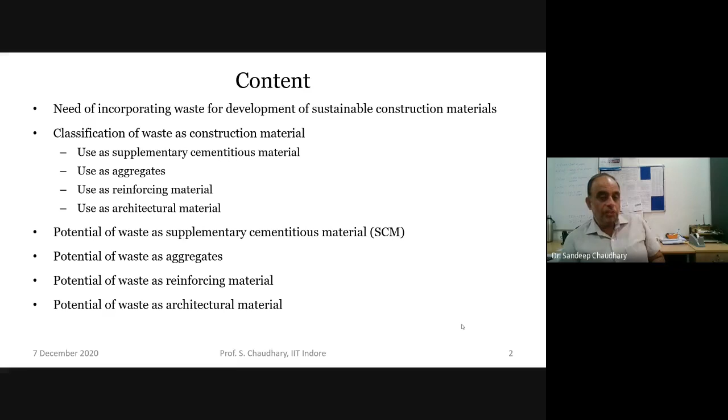Before going into that, we know that Indian Standard 383 now allows the use of most waste materials in construction, particularly in concrete. Because though people were using different types of waste in concrete, there was no documentation and no guidelines. But in 2016, Indian standards came forward. Of course Mr. Pant will also be delivering a lecture, and he'll discuss a little bit about that. After the revision of IS 383 in 2016, there has been a shift, and people have now started thinking very seriously about these aspects.

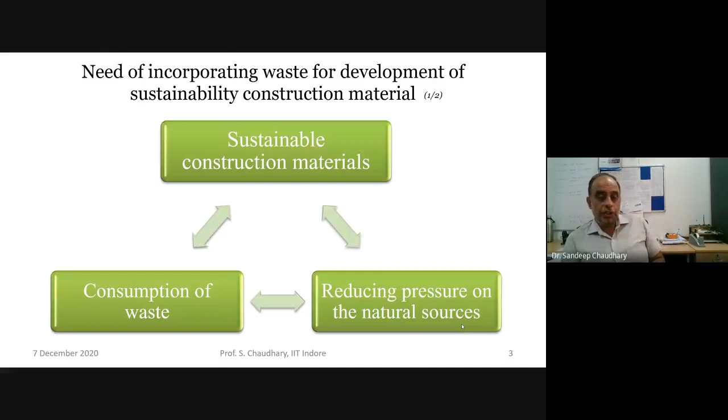If we talk about the need for incorporating waste, the idea is that on one side we have to consume the waste, which is a headache for us, and on the other side we have to use natural resources for concrete. We know concrete is the most widely used construction material, and its basic ingredients are cement, fine aggregate, and coarse aggregate, and everywhere we need natural sources. So there's pressure on one side to reduce natural sources, but on the other side, pressure to consume these wastes also. If we can make a balance and use waste in concrete, that's a win-win situation, and that is the need.

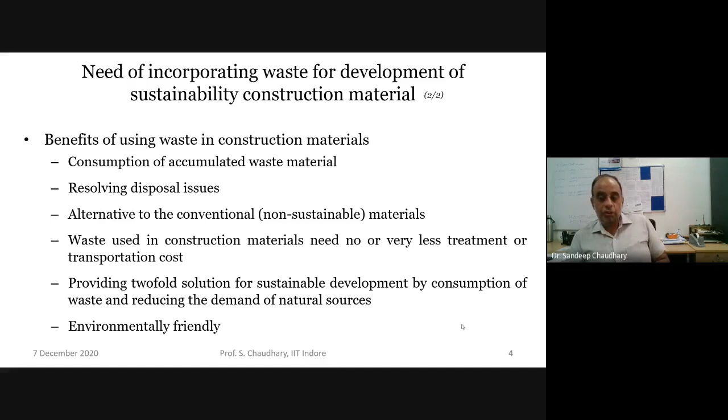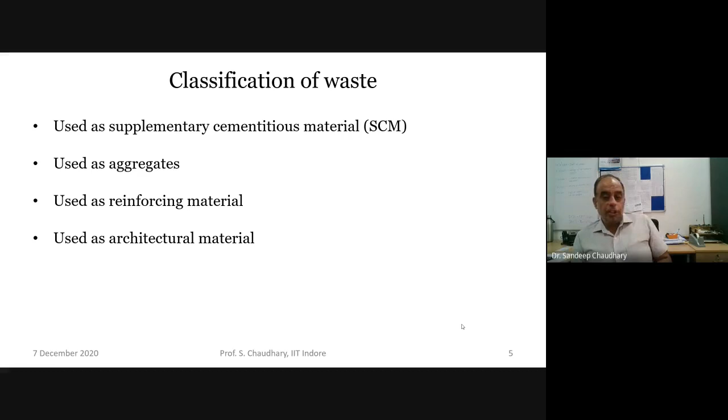So if we use waste, we can consume waste material, resolve disposal issues, use them as alternatives to conventional materials, and mostly they need no or very little treatment, providing a twofold solution. Now we'll go one by one and discuss different types of materials people have been using or talking about. Materials can be used as supplement to cementitious material, as aggregate, as reinforcing material, and as architectural material.

Now coming to supplement to cementitious material, we can use fly ash, GGBS (ground granulated blast furnace slag), rice husk ash, silica fume, metakaolin, glass powder, and marble powder. Of course, like fly ash, I understand Dr. Agrawal has worked extensively on that. And Kota has a lot of fly ash, and RTU has been working at the forefront in this area of utilization of fly ash in concrete in different manners. We'll discuss a little bit about that also.

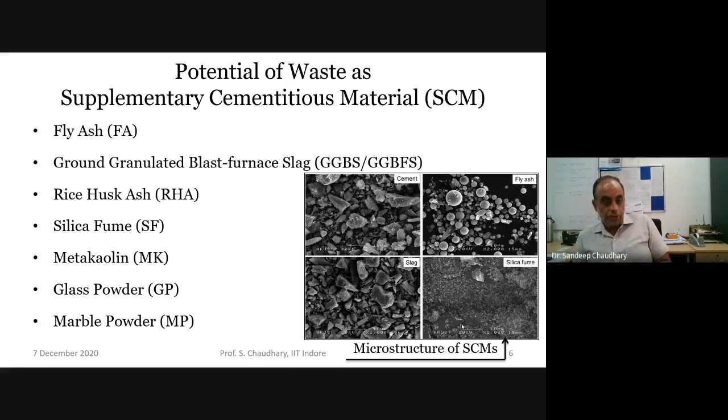So these are different materials which can be used as cement, or as a replacement of cement, or as supplementary cementitious material. We know some of them can be used as replacement of fine aggregate, but as engineers, we know it's always advisable to go for better uses. That is, if you use them as replacement of cement, that is a better situation. So coming down to fly ash, we know there are two types of fly ash basically.

One is class F, which contains less than 7% lime, glassy silica and alumina. And then there's another class C, which contains more than 20% lime, which is self-cementing.

We know nowadays, mostly if you go to the market, you'll just find Pozzolana Portland cement, because this fly ash is being used in the cement manufacturing, and instead of OPC, we're just getting Portland Pozzolana cement. So fly ash is an important ingredient there.

As Professor Sitharam was saying, it can be used in embankment, soil stabilization, flowable fill, asphalt, concrete. Geopolymers, of course, nowadays, that's another type of concrete where there's a complete replacement of cement by the fly ash. We can use it in roller compacted concrete, bricks, etc., fly ash bricks, etc.

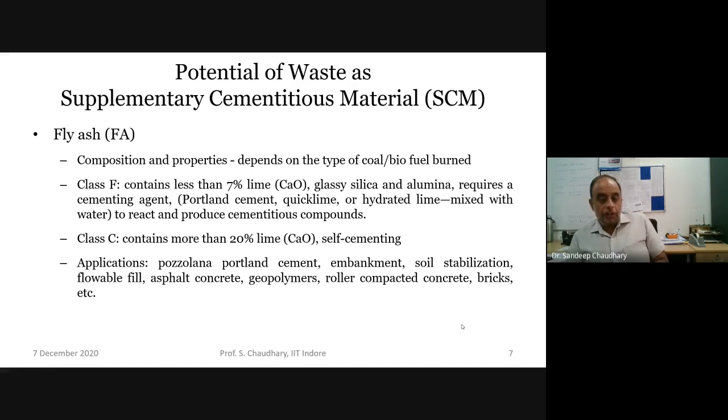But the idea is, what is the optimum uses, and what are the advantages and disadvantages? If we see the microstructure of coal-based fly ash, mostly we can see that it's a sort of spherical shape, and it gives a sort of later strength. If we need a high early age strength, we'll not get that strength. So we should know that it gives the same strength, but at a later age.

It is so much used now, it's difficult to find ordinary Portland cement in the industry. I see there are some persons from cement industry also. So for research purpose, if we have to use OPC cement, we have to ask especially for procurement. Otherwise, mostly PPC is available.

This fly ash can be used in soil stabilization also, and nowadays fly ash bricks are also being used. There are mandatory guidelines also from NGT and from the government that within a certain range of these thermal power plants, we cannot use fired clay bricks. We have to go for fly ash bricks only.

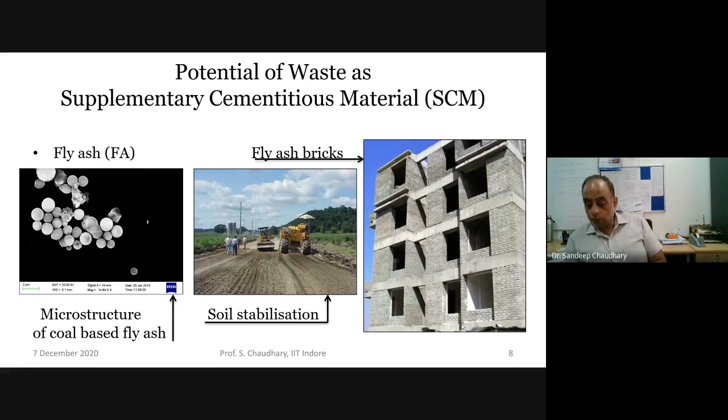Another supplementary cementitious material is GGBS, and it is obtained by quenching molten iron slag from a blast furnace. Here, of course, we know that if we talk about cement, mostly what is important is CaO and SiO2. So here it has both the components, CaO and SiO2. So it can be a very good supplementary cementitious material.

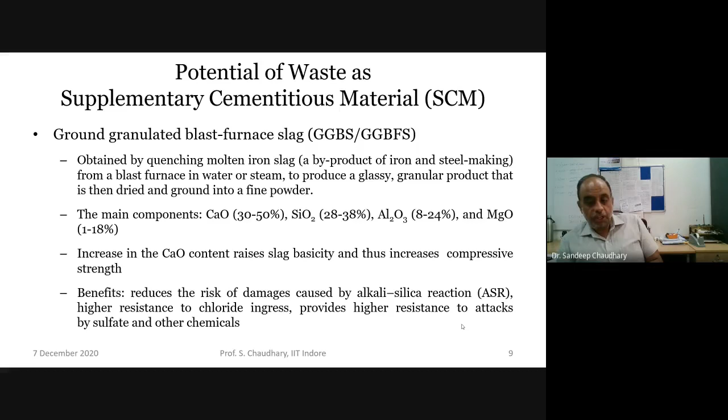If there's a higher CaO content, it will raise the slag basicity, and thus it will increase the compressive strength. The benefits are it reduces the risk of damages caused by alkali silica reaction. That's a durability aspect, which you might have gone through in your bachelor's or master's. And it gives high resistance to chloride ingress, and provides high resistance to attacks by sulfate and other chemicals. There's a schematic picture showing how it is obtained from the steel furnace slag.

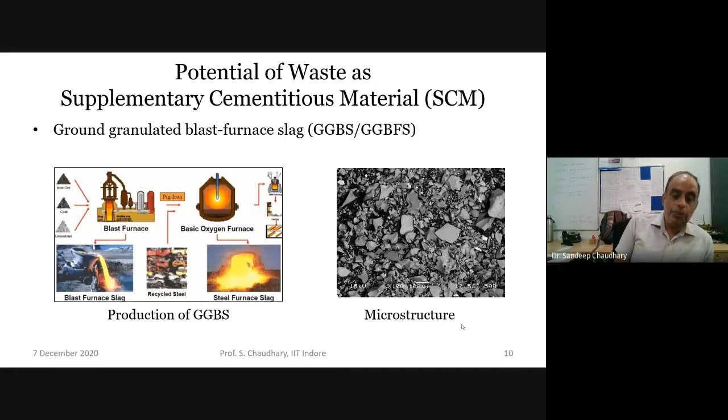So accordingly, we can identify the areas of application where GGBS can be used or where fly ash can be used.

Another very interesting supplementary cementitious material is rice husk ash, and it's the agriculture byproduct obtained by burning husk under controlled or uncontrolled temperature below 800 degrees centigrade. It is highly pozzolanic because of 85 to 90% amorphous silica, and pozzolana activity.

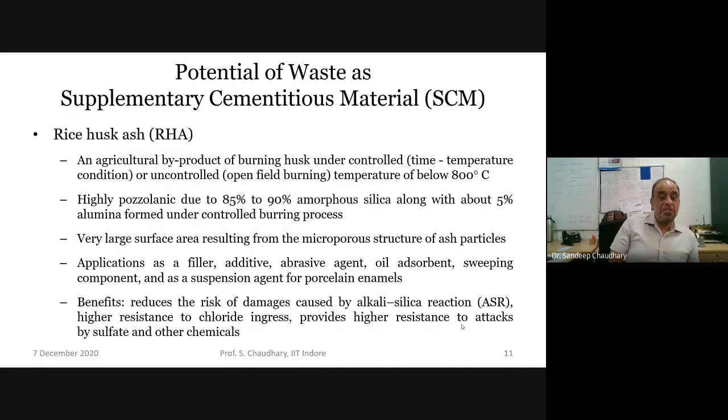Just to repeat, we call a material pozzolanic when in presence of water it gives us cementitious properties. So it's highly pozzolanic and has 85 to 90% amorphous silica. Important point here is what has been written is amorphous silica. So just presence of silica does not matter, it should be amorphous in nature. So there might be some other material which has higher silica, but if it's crystalline in nature, then it's not going to give us any advantage. So what is important is we should look for that amorphous silica.

And of course, it has 5% alumina also, and it has a large surface area. That will result in a sort of higher reactions. This forms from the microporous structure of ash particles. It has a wide application such as filler, additive, etc.

When we are using it as a supplementary cementitious material, we should understand that it's no more a free waste. Nowadays, if we have to procure this rice husk ash, we have to procure it in the form of bags and pay for that also. So it's just not that you are using a waste. Now we have to look for an economy also, because it has some other advantages. People have been using it in industry for other purposes, so there is a cost associated with that. We have to see the benefit versus the amount of money we are spending.

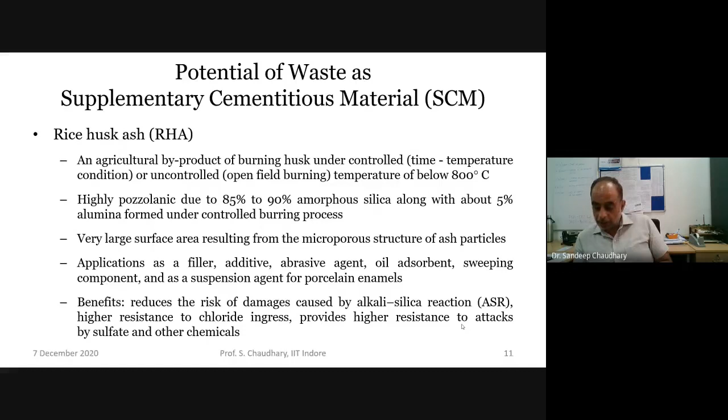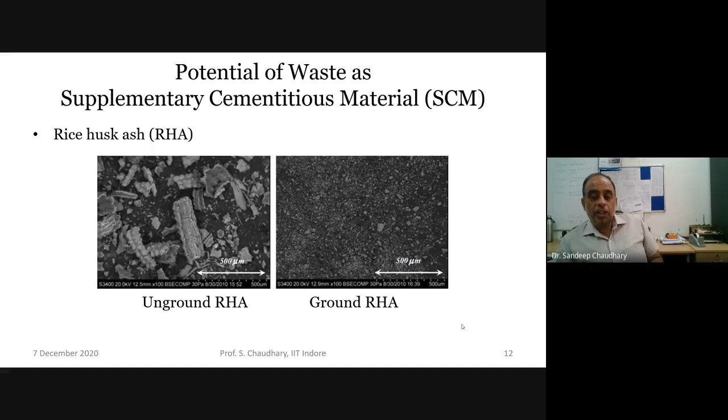The benefits are it will reduce the risk of damage caused by alkali silica reaction, high resistance to chloride ingress, and high resistance to attacks by sulfate and other chemicals. If you see its microstructure, in unground form there is a plate or granular type of structure, but in ground form there are very small particles.

Another interesting supplementary cementitious material, and if you talk about the one which gives us maximum strength, standing among the top, is silica fume. It's an ultrafine powder collected as a byproduct of silicon and ferrosilicon alloy production. It has spherical particles less than 1 micrometer in diameter, approximately 100 times smaller than an average cement particle. This small size is the USP of silica fume because it gives a very high surface area, leading to a good amount of reaction. This high fineness and presence of silicon oxide between 85 to 95%, even 98%, is responsible for high pozzolanic reactivity.

The oxides of silica fume react with and consume calcium hydroxide, that is CH, which we obtain from hydration of cement. This leads to densification of the matrix, strength improvement, decreased porosity, and better resistance to chemical attack.

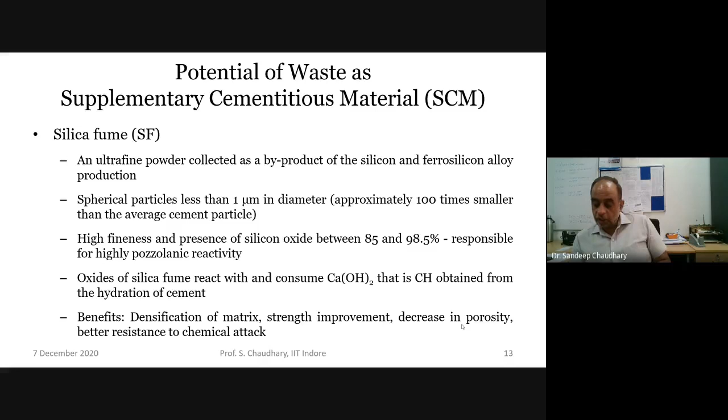Whenever we have to go for high strength concrete, that is concrete above M50 or M60, mostly it's a compulsion to use silica fume, because among the supplementary cementitious materials readily available in the market, silica fume stands at number one in giving maximum strength. Of course, the cost is associated with that, along with issues like heat of hydration due to those reactions. But anyway, to have very high strength concrete, you necessarily have to go for silica fume.

So the idea is, if we are going to use any material, whether as a supplementary cementitious material or as a replacement of fine aggregate or coarse aggregate, we have to link it from the microstructure. Here we are just seeing the scanning electron microscope images; I have not touched upon the XRD and EDS part. But ideally, if we are going to use some material as a supplementary cementitious material or in whatever form in concrete, we should start from this scanning electron microscopy, then go for the XRD images.

We should go for the TG analysis, etc. First we have to see the individual characteristics of that material. We should not go with the idea that it's a waste, and if there's any waste, just put it in concrete. Once we know these SEM images, once we know this XRD, we can very well judge what's going to happen finally when we use it in concrete.

Then we can go for mechanical tests and durability tests. The best way is to perform all the tests from the microstructure to the final test, or to the final application in structural elements like beams, etc. Then we have to see in totality whether our assumptions from the SEM images or from XRD investigations are getting reflected in the final results or not.

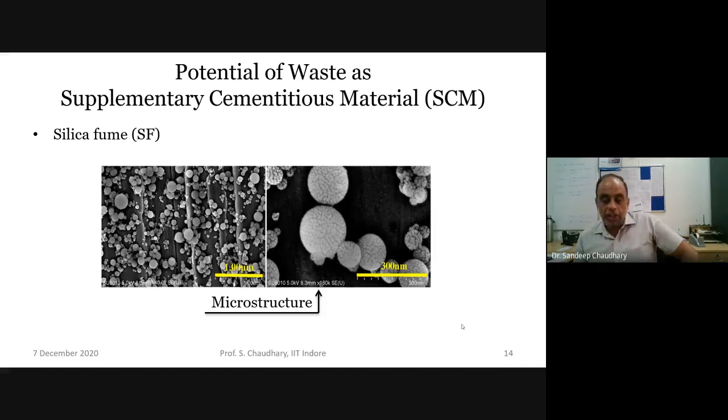That we can see only if we see everything in totality, from microstructure to complete analysis.

Another very recent area in which people have been working is LC3 cement, or the use of metakaolin. This is produced by calcination of high purity kaolinite clay at a temperature range of 700 to 850 degrees centigrade, and it's finer than cement particles. This helps fill the micropores of the binder. It contains a high amount of reactive silica and alumina, and provides better particle packing. The benefit is it improves compressive strength at early stages, low permeability, and decreased chloride ion penetration.

Of course, it's still a new material, and people have been working on different aspects, like the uses of fly ash and silica fume. There is complete literature available where you can find the effect of fly ash on compressive strength, flexural strength, tensile strength, all durability properties, and on microstructure. Same is true about silica fume.

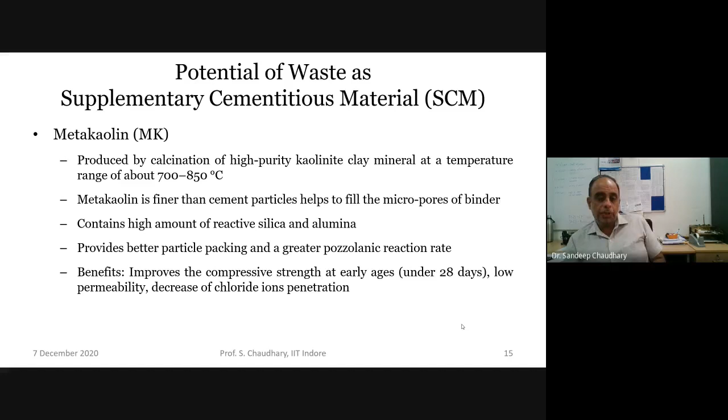So if we are using glass powder, we have to proceed with caution, and we cannot go for very high levels of replacement as in the case of fly ash and silica fume. Here the level of replacement is limited by this alkali-silica reaction aspect. So that's another interesting research area: can we control this alkali-silica reaction, and can we go for high levels of replacement of glass powder in concrete? Of course, there are benefits involved here - it improves workability, mechanical properties, and decreases permeability, etc.

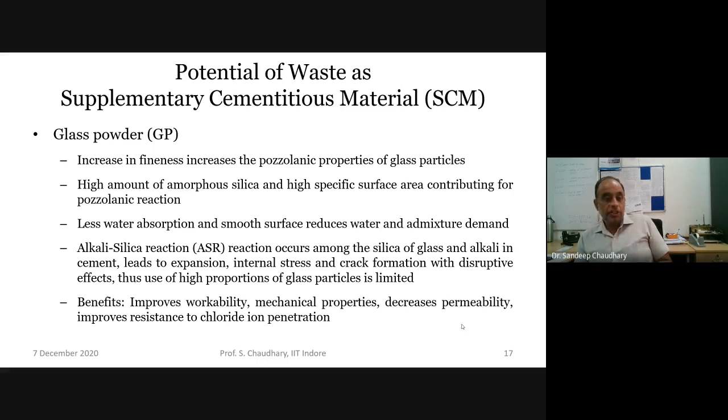And of course, another important material which people have been using, particularly in Rajasthan, is marble powder. It's an inert or quasi-inert material, and it has been used as a fine aggregate, but people are trying to see its uses as a supplementary cementitious material. What happens is calcite and Portland cement paste lead to calcium carboaluminate formation, and this calcareous filler has important binding properties developed by hydration of calcite and C3A.

So there is strength improvement at low replacement levels, observed mainly due to filler effect. But high replacement levels cause delay in setting time and lower the strength. This is another interesting area - how to achieve high replacement levels of marble powder in concrete, because there is a huge amount of marble powder waste in Rajasthan, and still there is no solution for that. People have worked on different aspects, but whatever they have worked upon does not allow for high volume replacement.

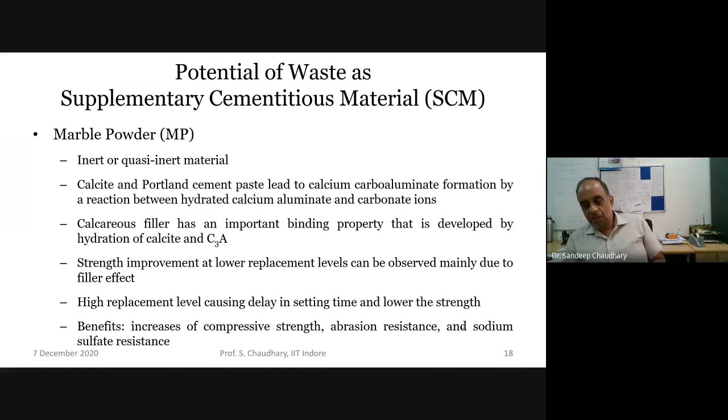So if we are using such waste in concrete, we have to look for high volume replacement, and we should try to overcome these adverse effects. Can we use some admixture? Can we use some other waste material, or some other non-waste material, to counter these adverse effects? All of us know there are huge amounts of marble stone dust, and we can see its microstructure - again, it's not spherical, it's granular, or you could say plate-type structures.

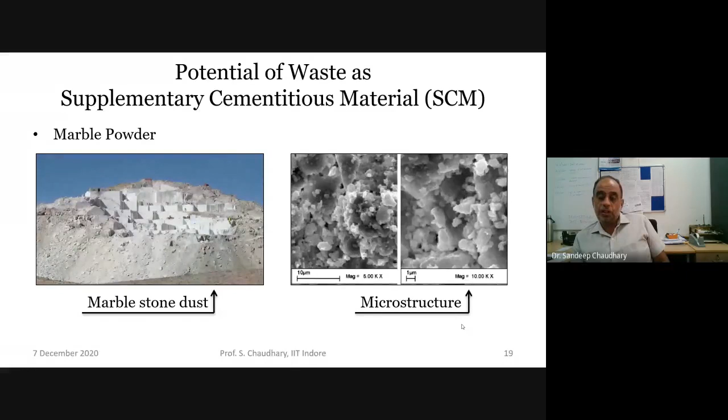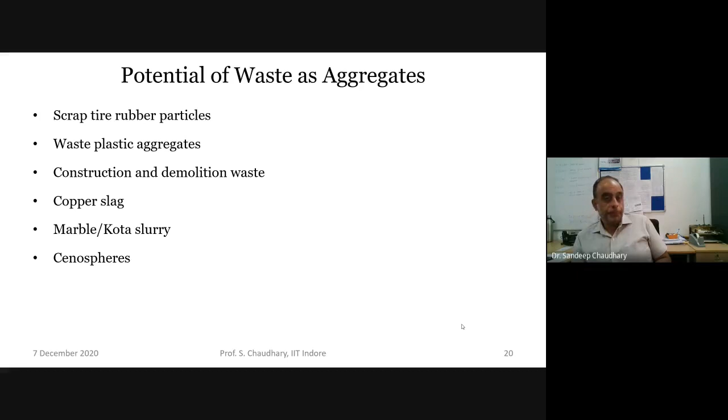Now, if we talk about waste as aggregate, we can use scrap tire rubber particles, waste plastic aggregate, C&D waste, copper slag, marble Kota slurry, and cenospheres. Scrap tire rubber particles, of course, Dr...

Trilok Gupta will also be talking a little bit about this. We worked together on this aspect.

What is important for scrap tire rubber particles is that its application is a global one. Other materials we discussed, like supplementary cementitious materials, marble powder, or waste aggregates, might have local applications, but this is a global problem across the world, and people are still struggling to find a solution.

Scrap tire rubber particles can be classified into three categories: chipped, crumb, and ground rubber. We should first see how people are disposing of waste rubber tires. Mostly they just throw them on the ground, or sometimes use a pyrolysis technique, burning the rubber tires to get black carbon, which they use as a pigment, etc.

They also extract steel fibers for other industrial purposes. So when we try to use these waste rubber tires in concrete, we have to consider their other applications in the industry. Just using chipped, crumb, and ground rubber in concrete without any advantage will not serve a purpose.

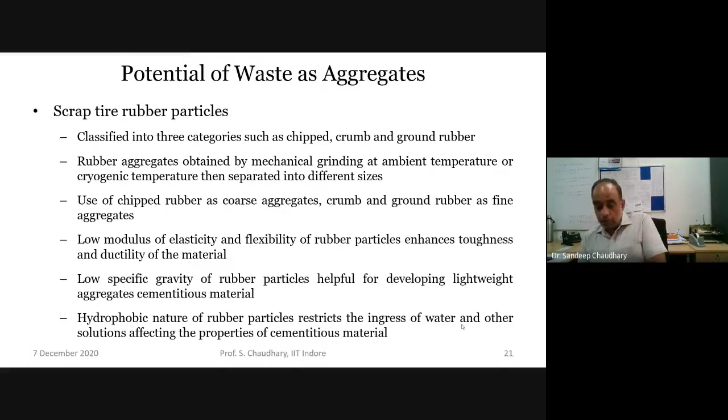There's a huge amount of scrap tires available all over the world, available as different types of rubber aggregates - we can use them in ground form, crumb form, or chipped rubber form.

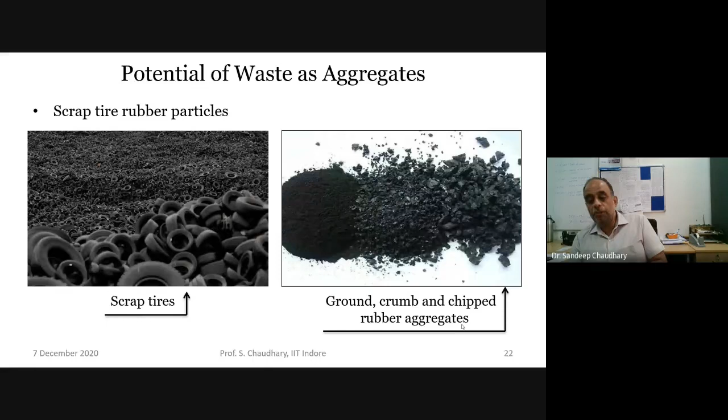Similarly, we can use waste plastic aggregates - waste plastic bags, PET bottles, PVC pipes, high density polythene, thermosetting plastics, mixed plastic waste. Different types of plastic waste can be used in concrete.

Of course, it's always with caution, because when we use waste plastic, it forms a sort of impermeable layer in the microstructure of the concrete, which creates a problem in the bonding between the CSH gel and the aggregates, etc. So the strength is naturally going to decrease. We cannot just say we'll use plastic in the concrete and make a great concrete.

That's for sure that the strength is going to decrease. But again, strength alone is not a parameter; there are many other parameters. So we have to look for applications where strength is not important but the other parameters are important.

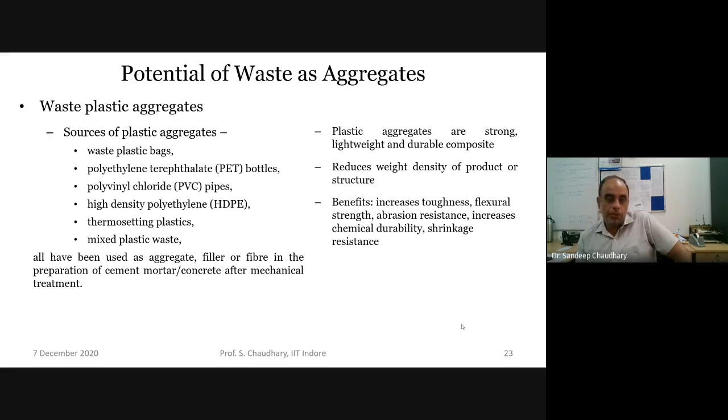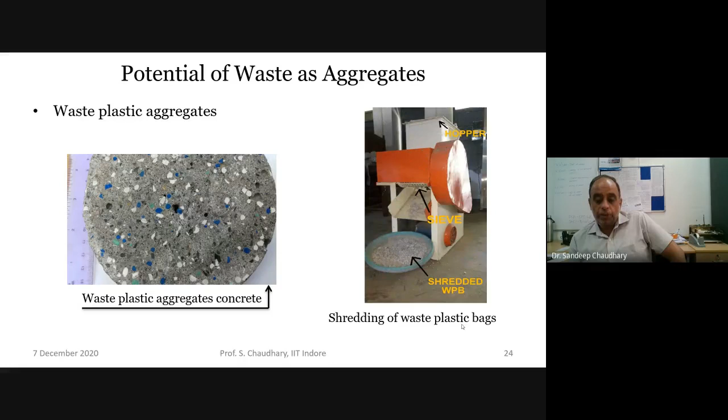In those cases, like paver blocks, we can use waste plastics. This is work done in collaboration with Dr. Vivek and Dr. Trilok, where we looked at waste plastic aggregate concrete using shredded waste plastic bags in concrete. Of course, the strength reduced a lot, but the other durability properties improved, and finally we could see that we can use it in paver blocks.

Another interesting aspect is C&D waste, which is now widely used. Nowadays I'm working in Indore, where the municipal corporation has made it mandatory to transfer all C&D waste to their plant. Their entire C&D waste is being recycled and used for making building products, and this is happening all over the world.

We can use the C&D waste in different forms, not only as coarse aggregate but also as fine aggregate. There are certain issues related with C&D waste. One is that it reduces workability to a large extent, because the cement particles stuck to this waste absorb a lot of water. So we have to use more water, which changes the water-cement ratio, or at times go for admixtures, but there's a limit on admixture use too.

This is a problem with most waste materials—whenever we use waste material in concrete, it directly affects workability, and it's always a problem to get back the same workability. A little of it can be recovered with admixtures, but there's a limit on that. Still, people have tried to work on different aspects here.

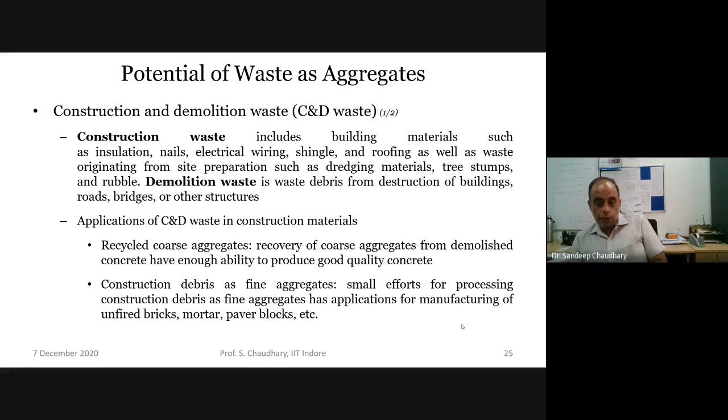People have worked a lot on the coarse aggregate application, but now people have started thinking about the fine aggregate application too, to give a complete solution. Many countries have now made complete buildings using C&D waste.

Another important problem associated with C&D waste is segregation of the waste. On paper it seems simple that if a building is demolished, we can directly use that C&D waste in concrete or construction. But a lot of other waste is also involved—glass waste, timber waste, and many other types of sanitary ware waste. So segregation of the waste is also an important area.

In many countries it's mandatory that whenever you dump waste, you must dump it only after segregation. There are many companies that work on this, and it's an interesting area.

It's also interesting that it's not only about using recycled aggregates, but also about using other types of waste like tiles, floor tiles, sanitary ware, and ceramic. People have been working on utilization of ceramic waste in concrete and found that it gives very good strength and durability, and has certain pozzolanic activity too.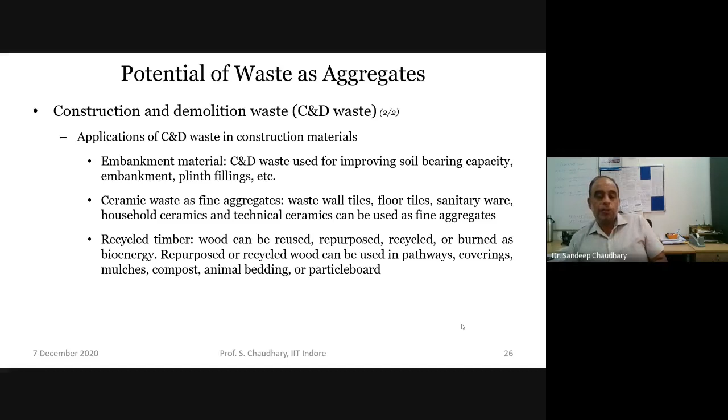Ceramic waste also has high thermal resistance, because ceramics are already baked at very high temperatures during manufacturing, so we expect high temperatures won't have a negative effect on this waste. That's also an important area. We can use recycled timber for different purposes as well, so we have different types of waste: recycled coarse aggregate, brick masonry waste, ceramic waste, concrete waste, and timber waste.

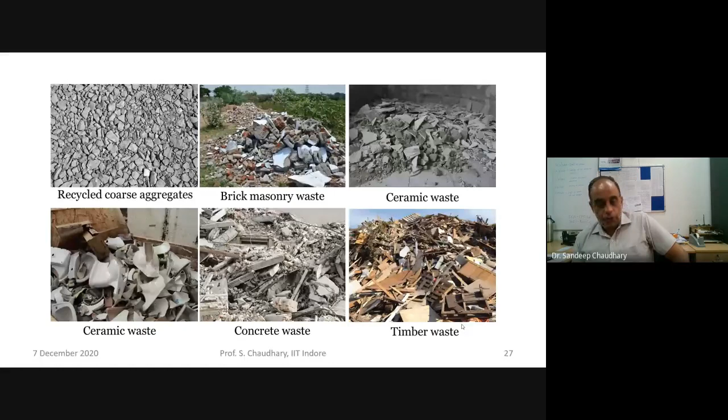The idea is to use each type of waste for its own specific purpose. Another is copper slag, and we know in Rajasthan there is a big mine in Khetri where there's a lot of copper slag available. This can also be used as aggregate, and it contains SiO2 plus Al2O3 plus Fe2O3 more than 70% of the total composition.

It has shown certain pozzolanic properties also, and people have seen that its use as fine aggregate increases compressive and tensile strength of concrete, decreases water absorption and depth of carbon penetration. This is an important aspect because corrosion is not directly taking place as such, it's related to the carbon penetration.

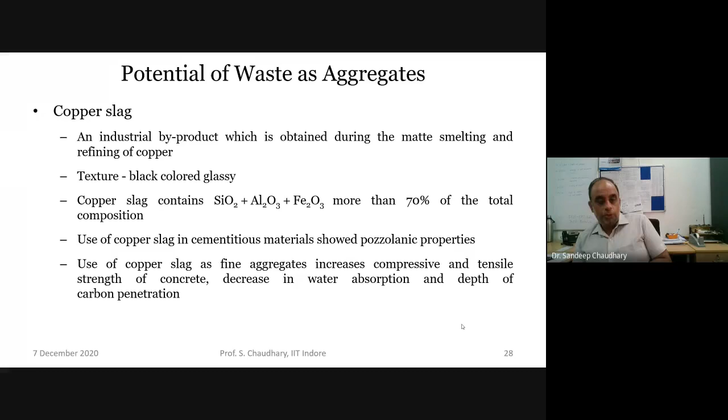It reduces the pH near the reinforcement, so it's not that finally we have to look for corrosion - we have to first look for this carbon penetration, which we call carbonation. The simplest test is the phenolphthalein test, where we spray phenolphthalein and see the change in color to find out the carbonation depth. So it's very important to reduce the carbonation depth, where this copper slag helps us.

Cenospheres are also nowadays being used as aggregate. They are produced as a byproduct of coal combustion at thermal power plants, hollow microspheres of size 5 to 500 micrometers, having shell thickness of 5 to 10% of the diameter. They contain 50 to 65% amorphous SiO2 - again we are stressing the word amorphous because we are concerned with amorphous silica - 20 to 30% Al2O3, and some Fe2O3.

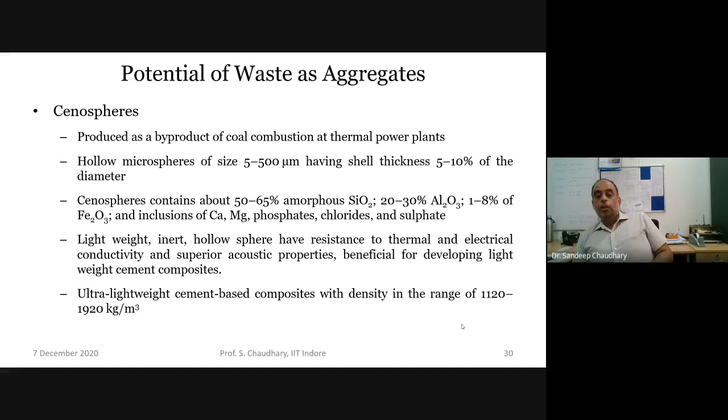It's lightweight, inert, hollow sphere, so it has high resistance to thermal and electric conductivity, superior acoustic properties, and it can be used for developing lightweight cement composites. We can make ultra lightweight cement-based composites with a density in the range of 1120 to 1920 kg per meter cube.

So that is it, you can see the microstructure - very spherical particles, and that is its own advantage.

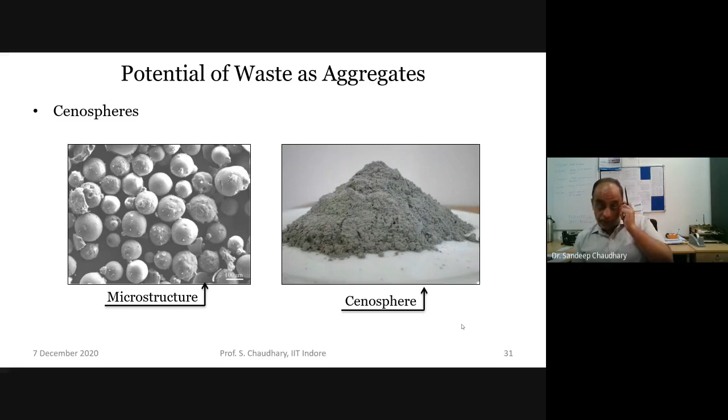We can use waste as a reinforcing material also, like scrap tire rubber fibers, recycled steel fibers, waste plastic fibers, and natural fibers. There's a big misconception here - people think that when we use these fibers in concrete, that will increase the flexural strength of the concrete as such. But it's not about the increase in flexural strength directly.

There might be a bit of increase in the flexural strength, but instead of flexural strength, what is important is these fibers - whether waste fiber or a fiber which is not waste - instead of achieving high flexural strength, what we are looking for is arresting the cracks in the concrete so that it doesn't have an adverse effect on durability.

Many scholars have a misconception that if I use fibers in concrete, I should get a very high flexural strength, but it doesn't happen most of the time. Some quite popular industrial fibers available in the market, if you use them in concrete, you will not find any increase in the flexural strength. So that should be very clear - it's not about the increase in flexural strength.

When we use the word reinforcing here, it's not about reinforcement at the structural level. It is about reinforcement at the material level, where we are trying to arrest the cracks to ensure proper durability of the concrete.

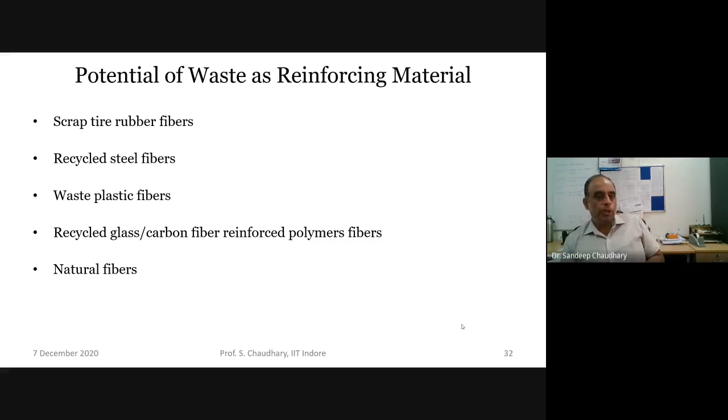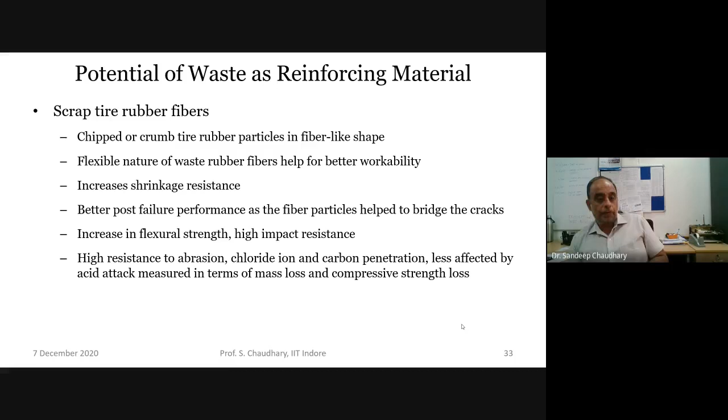So we can use scrap tire rubber fibers as a reinforcing material. Again, here we are getting an increase in flexural strength, but use of fiber does not necessarily mean we'll get an increase in flexural strength. What is important here is we get high impact resistance, and high resistance to abrasion, chloride ion, and carbon penetration, etc.

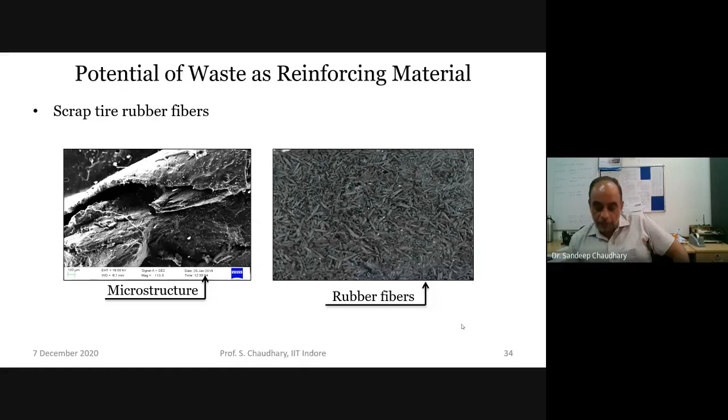It's not just about using some waste material and just finding out some properties. We can use recycled steel fibers also, again from the scrap tire, because they're 60% rubber, 20% steel fibers, and 20% textile fibers. But the issue is it is not that simple, because when we burn the rubber tires, we get the steel wires after burning the rubber tires. But those steel wires are so much intermingled among themselves that it's very hard to cut them in small sizes so that they can be readily used in concrete.

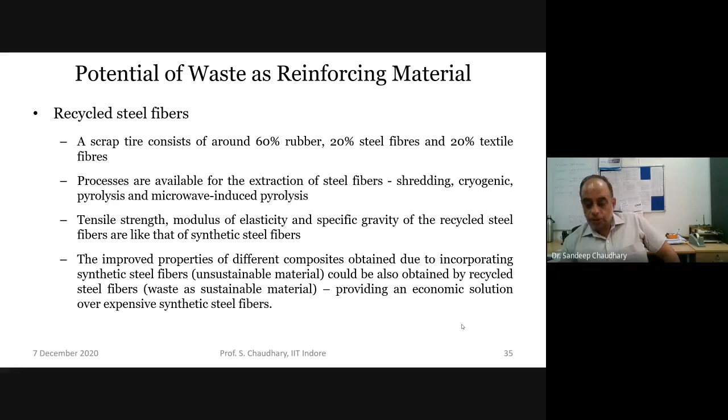So that is an area where people have been working. For research purposes, people are cutting those steel wires and using them in concrete, getting some advantages or improvements in different properties of the concrete. But that is not sufficient until we get a complete holistic solution. The idea is still that if we are using these steel fibers at a mass level in concrete, then how to go for that mass level application? What is the way out to cut down these steel fibers at the mass level? This is also another important area where we need to look into.

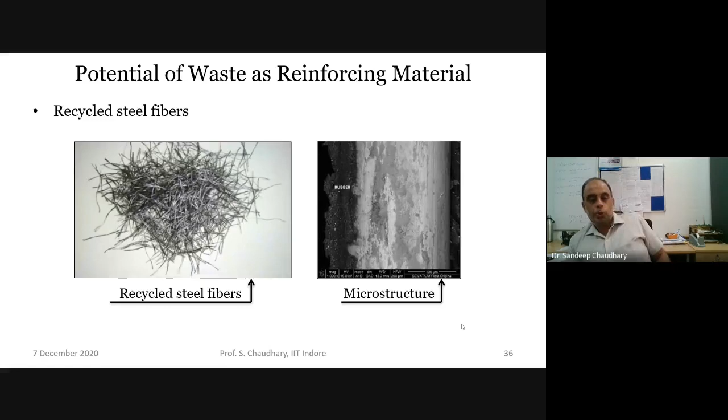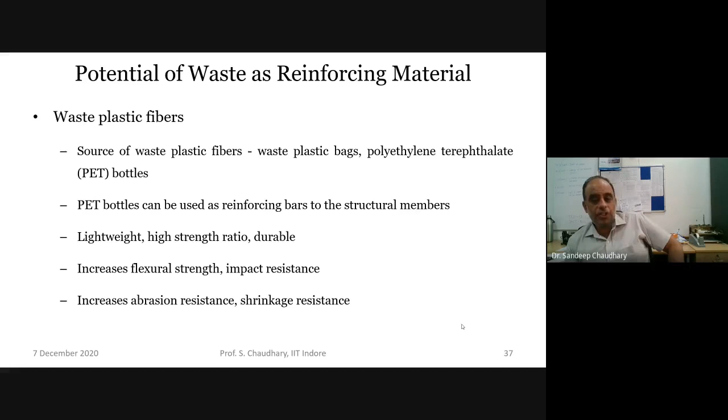We can use waste plastic fibers also from waste plastic bags, polythene, or PET bottles. People have used PET bottles directly as reinforcing bars to structural members. Of course at a very small scale, it cannot be in big structures, but people have made small structures by directly using the complete PET bottle as a reinforcing bar, because it's lightweight, has high strength ratio, and is durable. It increases the flexural strength if you're using a complete PET bottle as reinforcing bar. So we can use waste plastic fibers, and waste PET bottle as reinforcement, complete bottle as reinforcement, etc. So this also has been done.

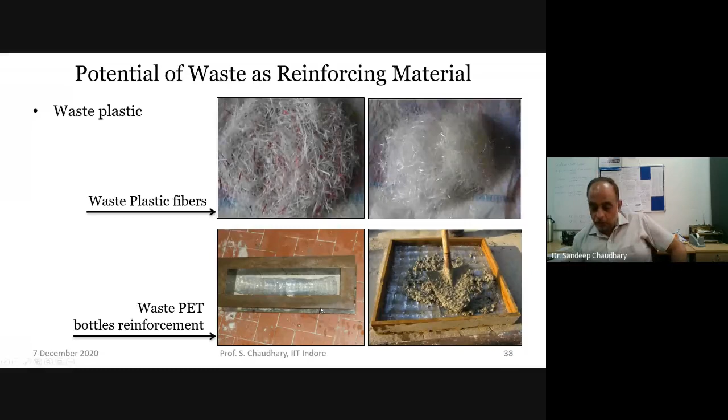You can use recycled glass, carbon fiber, reinforced polymer fibers also. They have high compressive tensile flexural and impact strength. And of course, we can use the virgin glass or carbon fibers also, but they are quite expensive. So a significant amount of unfinished material is left as waste along with a large amount of FRP discarded at end of service life. That can be used, of course, if somebody is interested in working in this area.

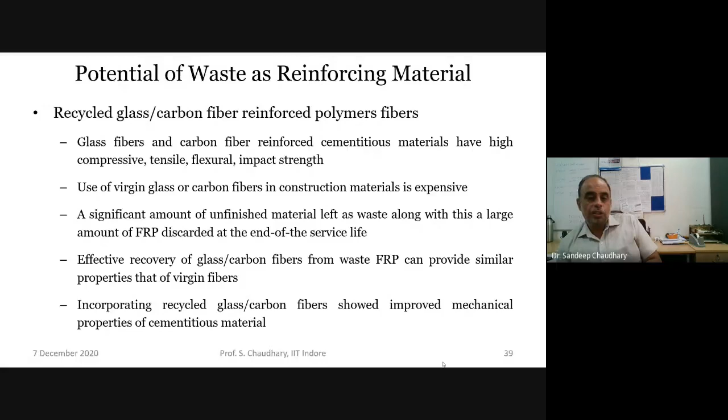Or, what we should aim at is connecting with the industry, those industries which are producing the virgin fibers or virgin material, because there's always a certain amount of wastage which they are throwing out. So somehow if we can connect with those industries and use the waste which they are throwing out for our purpose, that will give us an advantage, because the industry will be ready to give that waste material for free, otherwise they have to dispose of it. And we'll get almost the same properties, because industry might be using that material for some other purpose, but for our purpose, whether we are using the virgin fiber or some waste material from another industry's perspective, it is the same. So we should look into that aspect also.

So this is like how recycled GFRP fibers look like, or how recycled CFRP fibers look like. And just to give an idea on the scale, their sizes have been shown.

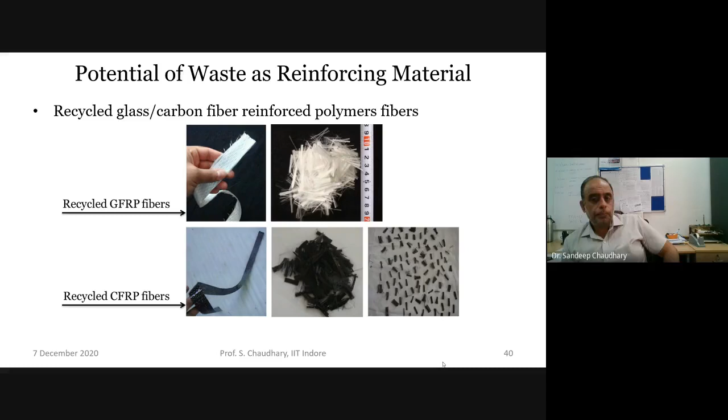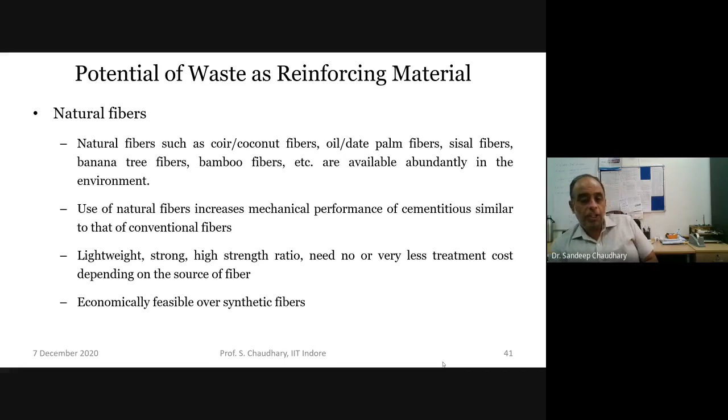We can use natural fibers also, like coir coconut fibers, and this increases mechanical performance similar to conventional fibers. They're lightweight, strong, have a high strength ratio, and need no or very little treatment cost. And of course, they're economically feasible over synthetic fibers. But in the short term we can have some good properties, though it's still an area to work upon.

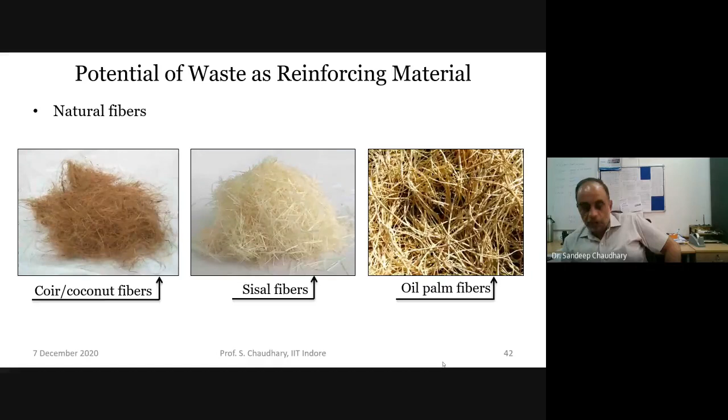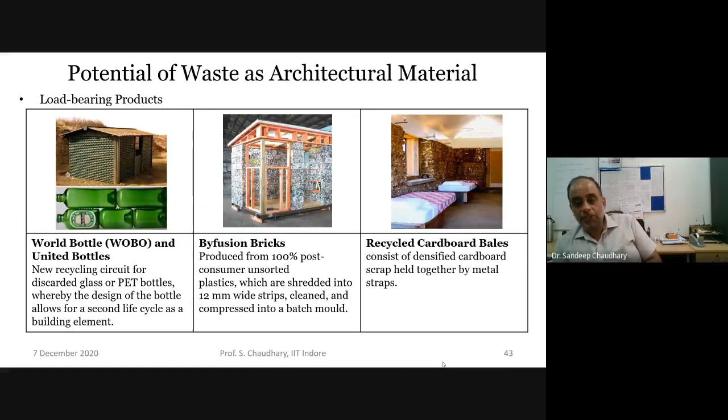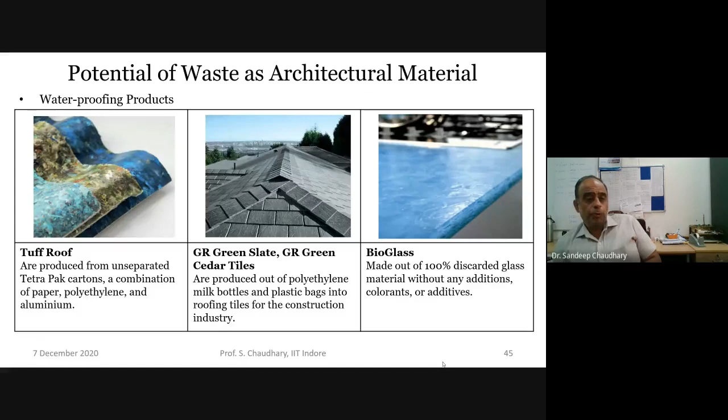I'll just open up one more.

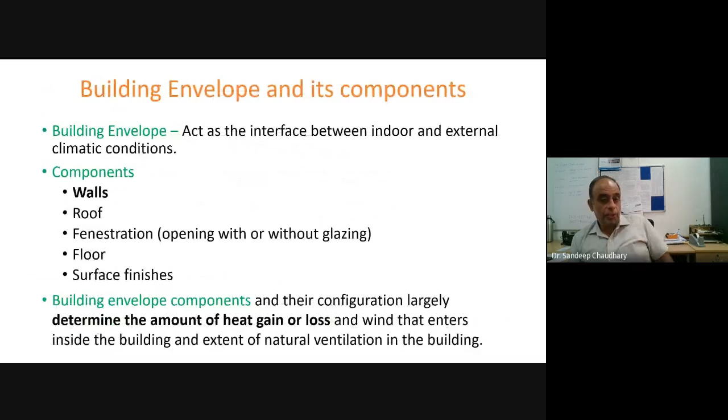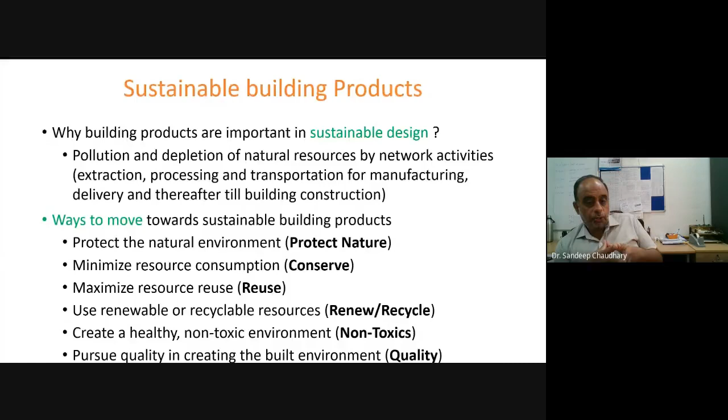I'm just coming to this sustainable building product. So why are building products important in sustainable design? Because we have to protect nature, we have to minimize resource consumption, we have to maximize resource reuse, and so on and so forth. An ideal sustainable building material should be environment friendly, should have no adverse impact on the health of the occupant, it should be reclaimed, recycled, it should be made from renewable raw material, and there should be a use of renewable energy in network activities.

So if you see a very idealistic sustainable building material, then on the right hand side you're seeing a figure. It should involve all of these, which gives you the life cycle of a building material. Of course, we do understand as engineers it's not always possible to go for all of these, or to have all these 6, 7 things in each material.

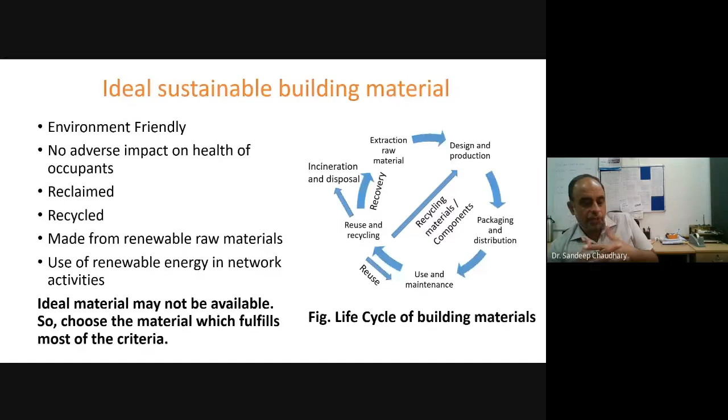But ultimately we should know that if you're saying some building material is an ideally sustainable building material, then it should fulfill at least some of these parameters, if not all 7 or 8 parameters, at least 4 to 5 parameters. And if you talk about life cycle analysis, then we have to look for the embodied energy, resource reuse, recycled content, etc. So we have to keep all these different aspects in mind.

It's not only about the single aspect which we had been using or discussing in our earlier presentation. Along with that, we need to look for embodied energy - what is resource reuse, what is the recycled content, how much of it is recyclable.

The material should have low ozone depletion potential. It should be natural, biodegradable. It should be locally available, a rapidly renewable material. It should be compliant with clean air and water. So all these criteria should be kept in mind.

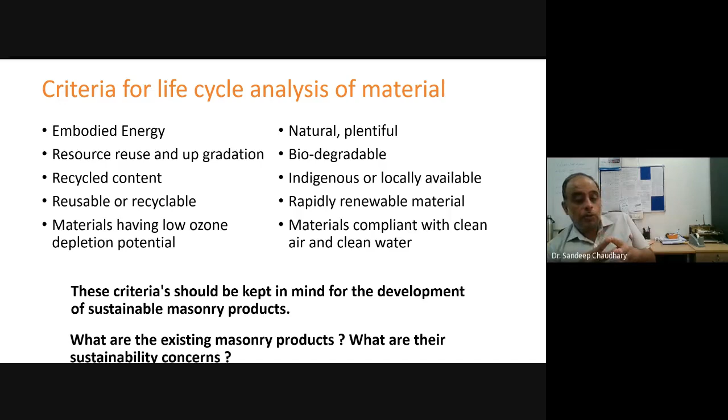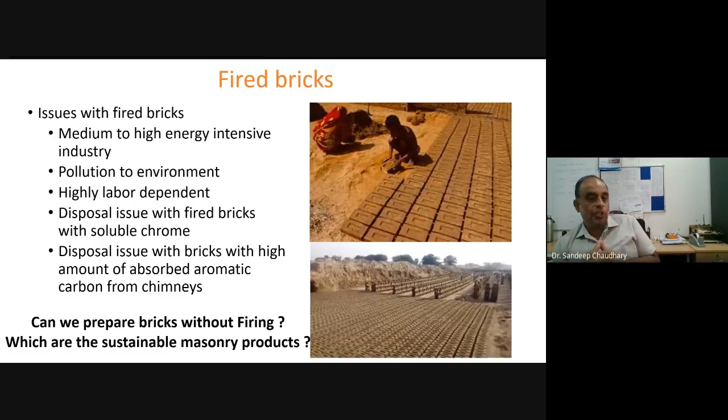So if we talk about the existing masonry products, normally we have either the fired bricks, but we know there are a lot of disadvantages associated with fired bricks. We're not going much into those details. There are many issues like medium to high energy intensive industry, pollution, highly labor dependent, disposal issues.

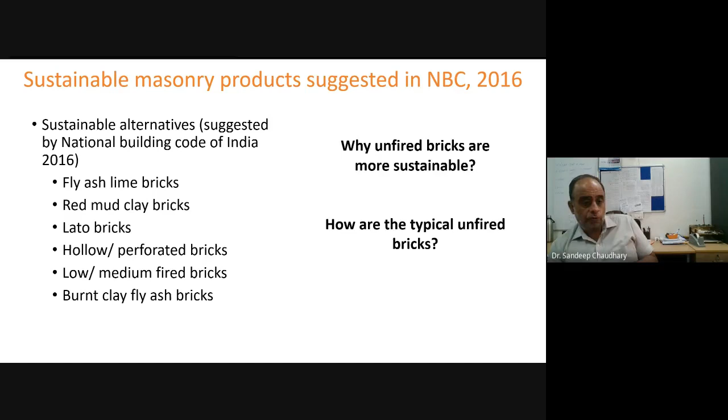So the alternative was like we can go for unfired bricks, and we know nowadays a lot of people or construction activities use unfired bricks or fly ash bricks. And these are typical fly ash bricks.

But if we go further in detail, that's not the end of the story. We have just addressed a tip of the iceberg by using fly ash bricks. What we need to do is make it further more sustainable, and before that, we need to understand how they're manufactured.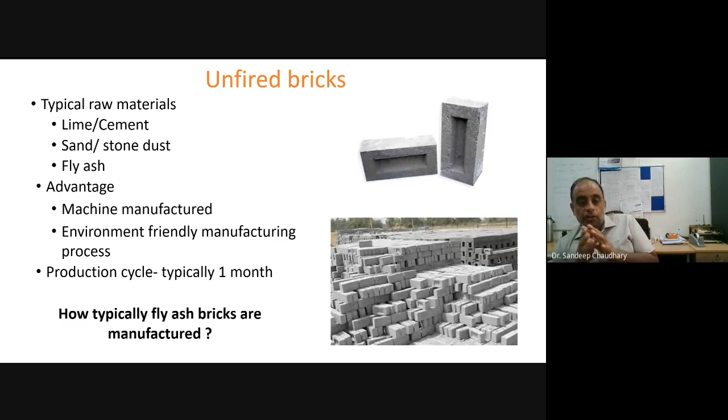So a typical manufacturing process involves grinding of wet lime, then fly ash plus stone dust plus additional water and so on. There's an entire process involved. It's not like a fired brick where there's just mixing of clay and then firing, with limited processes involved. Here, there are a whole lot of processes involved.

So if you see, from the point where we started, it's not only about the uses of fly ash, it's about the uses of fly ash in the product. Here we are using it in the product, in the brick. And it's also not only about the uses of fly ash in the brick only. Ultimately, it's about efficient use.

How can we put some interventions, can we intervene in this manufacturing process? Can we make it more robust? Can we make it more sustainable? Only then can we say we have got a sustainable building product. So it's not just use of fly ash in concrete, it's use of fly ash in the brick, one step ahead, and then efficient and optimum use of fly ash in the brick, with some modifications in the manufacturing process.

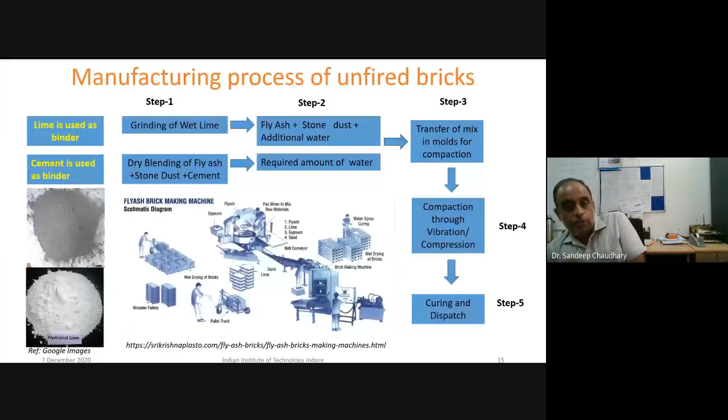So what we try to do is determine what should be the quality of raw material, what should be the proportioning. One of the areas where we are lacking till now, despite talking a lot about these fly ash bricks, is that unfortunately there is no Indian standard code which talks about the mix design when we are making a mix for fly ash bricks. That's a major challenge to the fly ash brick manufacturing industry.

And many of the fly ash brick manufacturing industries have closed down due to this particular challenge. That's a very big challenge. We have our Indian standard codes, IS 10262, for concrete mix design, etc. So why can't we have a code for mix design of these fly ash bricks?

The challenge is that if we get fly ash from different industries, each fly ash has a different chemical composition. So one day they're getting fly ash from one industry, other day from another industry. These brick manufacturing industries face a whole lot of difference in chemical composition, and a lot of variation in quality. It's more or less the same challenge we face in concrete mix design.

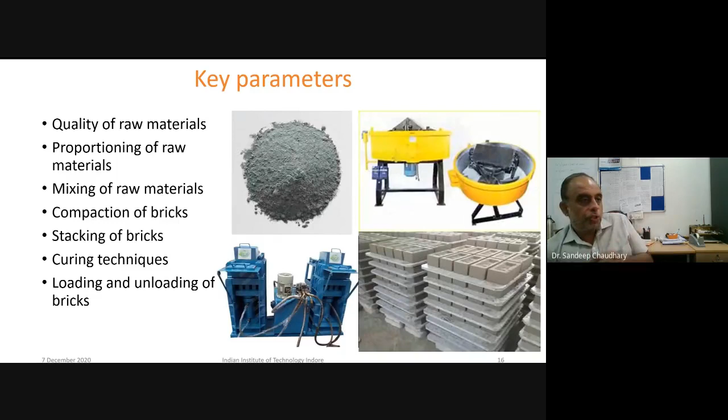Unfortunately, there's no such parameter which has been established by Indian standards or by any government organizations for the use of fly ash or other ash in fly ash brick manufacturing industry.

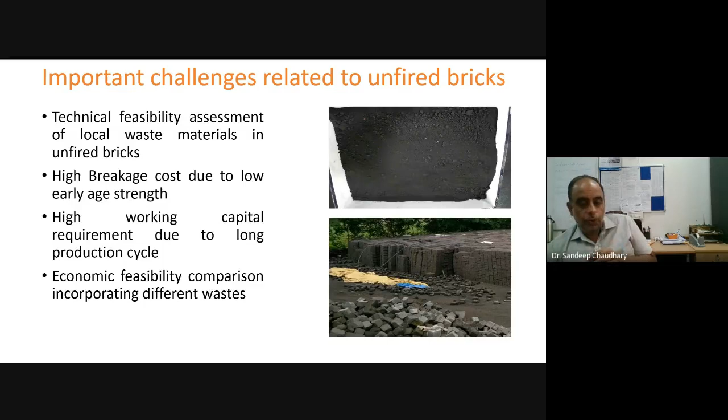So the important challenges are: technical feasibility assessment of local waste material, high breakage cost due to low early age strength because the manufacturing process needs to be streamlined, high working capital requirement due to long production cycle, and economical feasibility comparison is not available. If an industry wants to use one type of waste among five types, which type should the industry use? There are no guidelines associated with that. That's another big challenge.

Then what should be the optimization of manufacturing aspects? What should be the mix proportion, the mixing strategy, the casting method, the curing condition? Then performance assessment of waste incorporated brick mechanical durability aspects. And there should be public awareness, and we should try to give technical support to manufacturers to increase acceptance of waste incorporated brick.

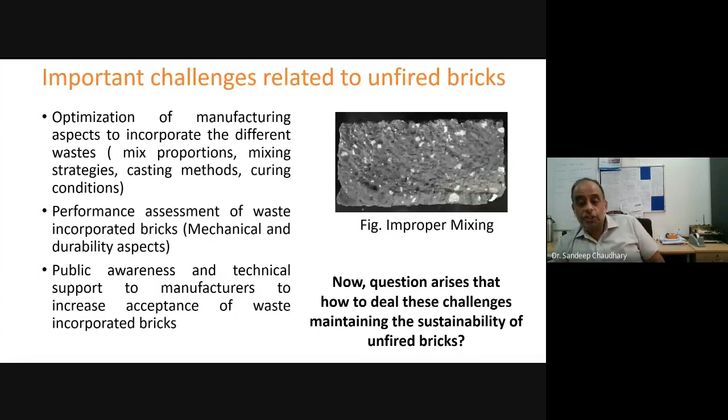Now the question is how to deal with these challenges while maintaining sustainability of unfired bricks. There can be different strategies, like maximizing the use of waste material as ingredients, selecting stabilization technologies to incorporate maximum amount of waste, using local waste materials rather than transporting from distant sources, and using efficient mixing strategies - mixing time, mixing sequence, mixing equipment.

We can use efficient casting methods, way of compaction, compacting equipment. We can use efficient curing techniques - medium curing. What should be the curing medium? What should be the curing parameter? What should be the curing age? And we can prepare local maps of industrial and domestic waste for effective utilization.

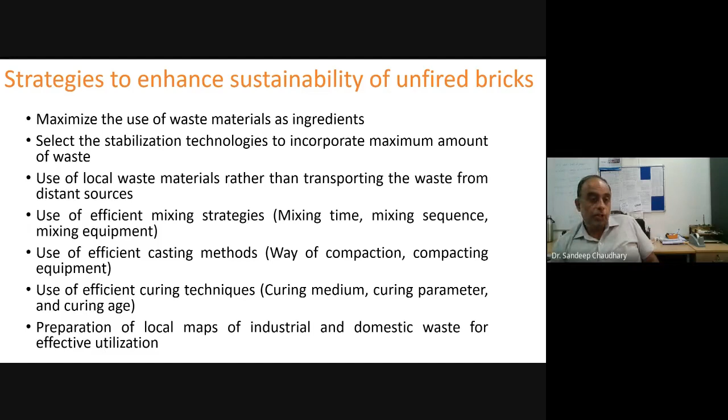Different challenges are there, like waste. People have been using fly ash, but why can't we use rice husk ash? Why can't we use metakaolin? Why can't we use biobriquette ash? Why can't we use copper mine tailings? Why can't we use ceramic tiles?

If you're using this, what is their effect on the manufacturing process of these fly ash bricks? What is their effect on overall physical properties, overall durability properties of the concrete? What is its effect on the weight? What is the effect on the costing, etc.? And what is its effect on the production cycle, etc.?

So all these things need to be looked into in much more detail. The industry means - like there are certain guidelines for aggregates. What are those guidelines for the industry? There should be a ready chart, readily available chart.

We cannot expect industry to carry out all the detailed characterizations, which require facilities that sometimes we also don't have access to. So local manufacturing industry, we can't expect that from them. We have to give them ready solutions - in the form of charts, graphs, or guidelines - so that if some industry is thinking about use of rice husk ash, they know the guidelines.

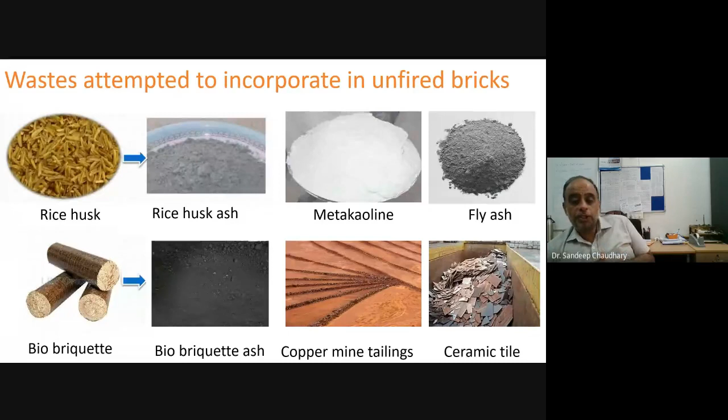If industry is thinking about using copper mine tailings, what are the guidelines? What is the optimum use? What is the maximum? What is the minimum use? What are the adverse effects? What are the positive effects? All these aspects need to be looked into.

Like again, you can use recycled paper mill residue, phosphogypsum, pond ash, quarry dust, crumb rubber, brick dust waste, cement kiln dust, raw boiler ash, ground boiler ash, GGBS slag - and we try to see what happens when we are using different types of ash.

Interestingly, even in a city you will find 20 types of ash from 20 different manufacturing industries. Each manufacturing industry will produce a different type of ash. The chemical characterization will be completely different, the chemical composition will be completely different. So how do we incorporate those changes? That's a big challenge.

So I will stop here right now. Though we have worked significantly in this aspect also, I'll just stop here, because what is important is not that I can present those solutions, but to keep in mind that if we really want sustainability in the construction industry, it's not about just doing some basic tests and saying this is useful or not useful.

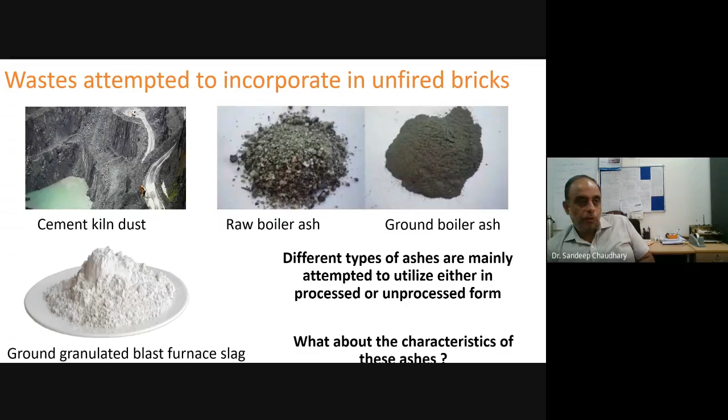We have to put that to the product level, and at the end level, we have to say: this is the product we are offering, and these are the guidelines. If there's a change in these properties, just make these changes and you can get a similar product. That can be our contribution to the construction industry for sustainability, instead of just doing some small tests from the research perspective and saying this improves, this decreases, this increases, this will happen, this will not happen. What is the end solution at the level of the product? That is more important.